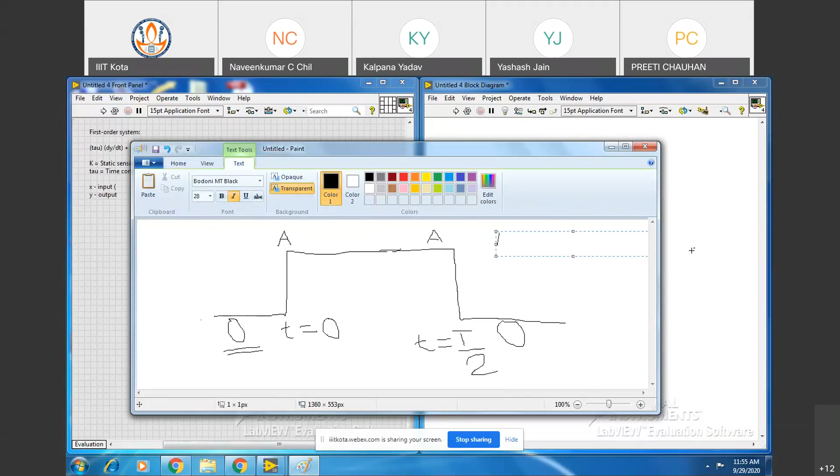Now if you see this total, is it resembling something? This total input is called a pulse input. You got it or not? This is your pulse input. Now, can you see, the pulse input has two components. This one is your positive step, and this is a negative step.

So in order to know the system dynamics, we always calculate how fast the system rises from one level to another level. Suppose you apply a step input. How will a fast system respond, and how will a slow system respond? What do you mean by a slow system? Suppose you have applied one input like this. Just see how I am drawing. This is the behavior of a slow system. Ultimately, it has to catch the final value.

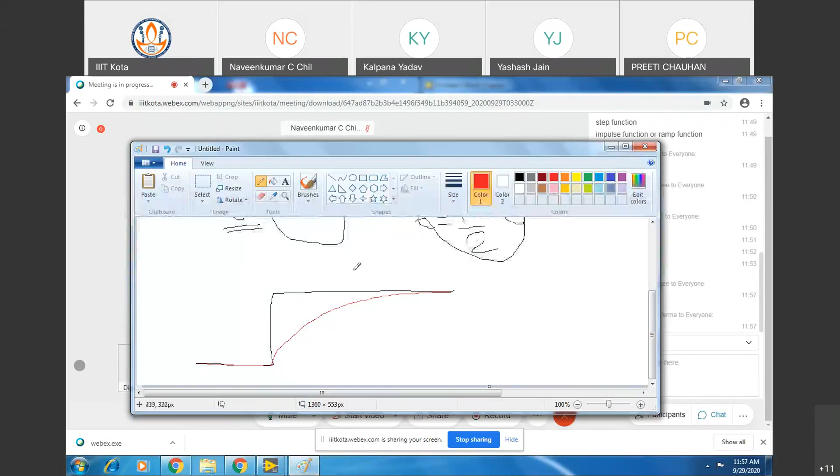Is everyone with me, following? Not getting voices. Yes, sir, you are saying that yes, you are following. Okay. So I'll move ahead.

So this is your slow system. Now, if another system is there, and suppose that has a response something like this, then which system is faster? Can you tell me? The one which reaches the steady state earlier, that system is considered to be faster, right?

Now there is one particular quantity that determines the speed of response for any first order system, and that is called rise time. Rise time is the time taken by the system to rise from 0% to 90% of the maximum steady state value. So the system which takes less time to go to the 90% and above range will be considered faster, and the system which takes a longer time to move from 0% to 90% will be called slower.

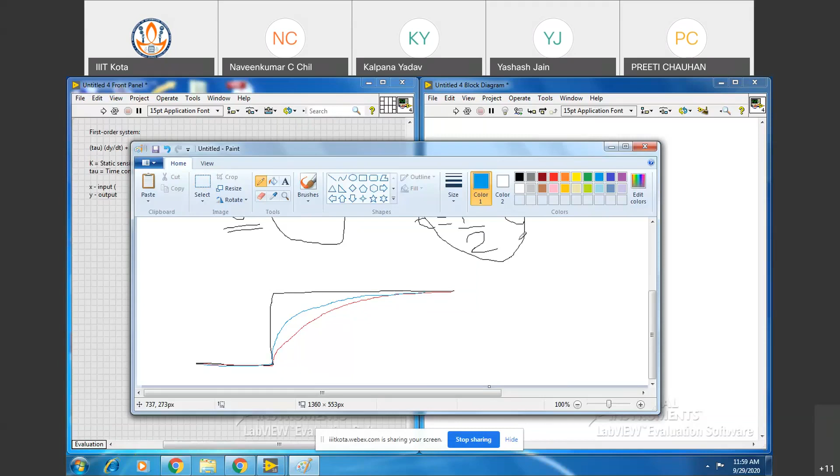So this is one input that is called a step input. Now there are other inputs also. We will see the step input in the form of a square waveform. Okay, input is a square. Then what else can there be? Have you heard of the sinusoidal waveform? Why do you go for a sinusoidal analysis?

Sir, because any signal can be represented in terms of sinusoids because of the Fourier series. Yes, any periodic signal can be represented as a sum of sinusoids of different frequencies, that we know. Okay. So that is one very important concept.

Raghav, I think he is Raghav.

So that sinusoidal response is one of the important ones. Then one more thing: if you want to know the frequency domain characteristic, whatever signal I have drawn earlier was in the time domain, right? This was the time domain behavior. Now if you want to know the frequency domain behavior, why you go for it, you see which frequency components are the strongest.

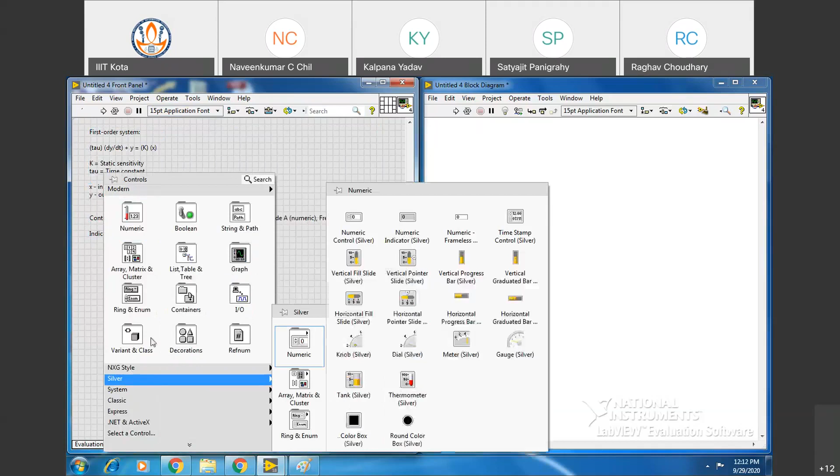Now let us make something. Let us go to silver, numeric. Okay, let us say this is one, what you want to call it, static sensitivity.

Let us make a copy of this. We'll call it time constant. Let us name it as K, and the time constant, let us name it as tau.

Sir, we should do it along with you, right sir? Now, yes, that's what I was feeling, that no one was responding. Can you start along with me? Yes sir, we will. Both are two numeric controls, right sir? Yes.

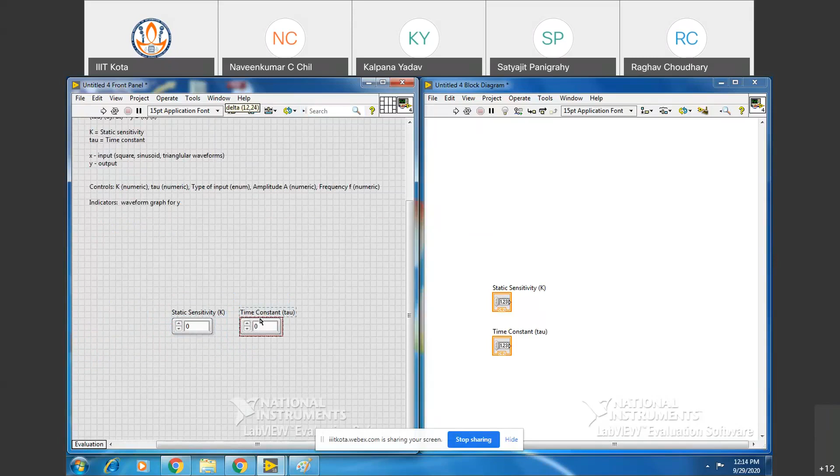So these are the system description. Now we have put the system description. Let me put this nearby. Now it is fine.

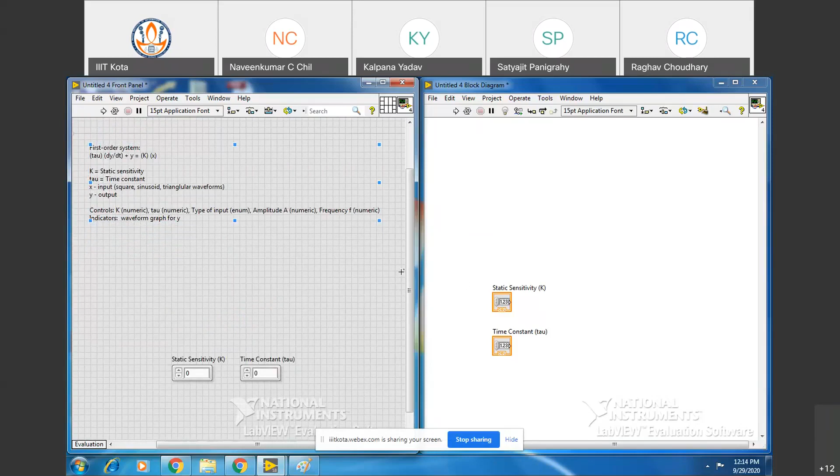Is everyone done till here? Now tell me, I have put two controls right now, and what are the other controls?

Other control will be one type of input. So I'll go to silver, ring and enum, I'll go to enum, and I'll put type of input here.

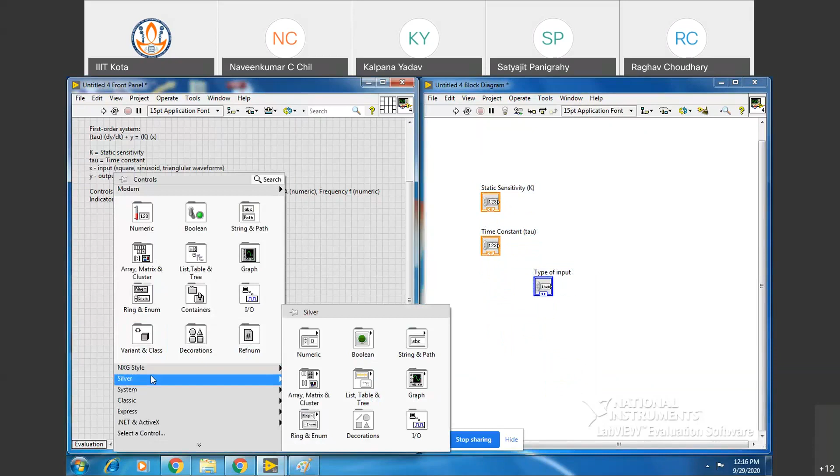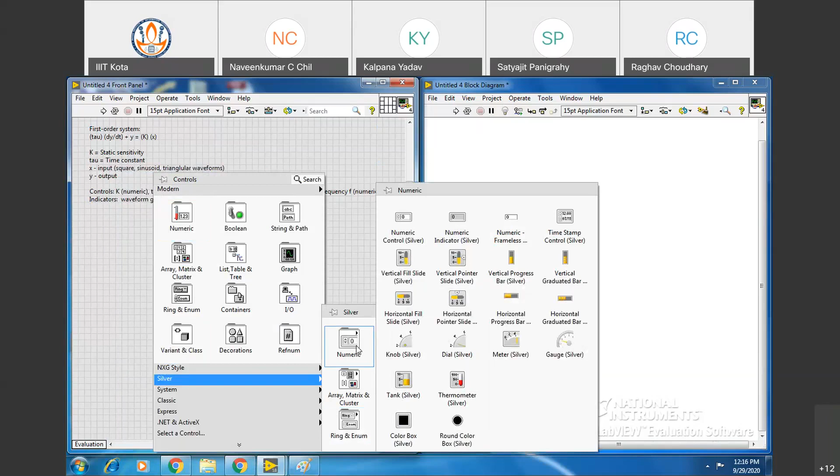Everyone has done up till this? Should I repeat how to do it? Go to front panel, right click, go to silver. I can pin it also, that Vineet told to pin that. So then go to silver, go to numeric, and go to control, numeric control.

Again, for a time constant, you highlight that, you select that particular control, then with your left hand press the control button and drag it like that.

Could you see, sir? I have placed both of them from this control palette. Any problem, sir? No problem, no problem. Only that it will look a little fancy, but there's no issue. Actually some problem will come in the actual deployment where you want to keep the size of the other things very minimal, so there it can become a problem.

You'll select and give that as a minimum space. Anyway, that you have done, Naveen, till here.

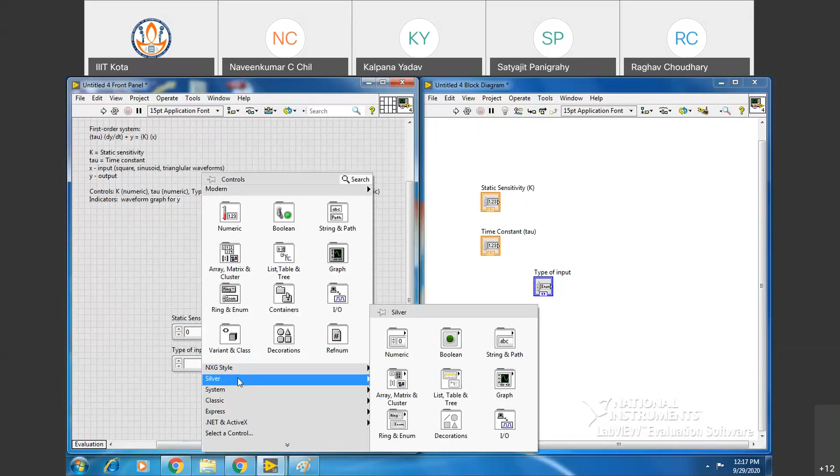Static, sensitivity, actually that enum placing, I need to repeat the steps, sir. Yes, please. Right click there, go to silver, then on the row number 3, ring and enum, and then go to enum.

Yes sir, for this also I was just directly going to this. Yeah, no problem, this also enum. Okay, that you can do. So yes sir, that we have put. Now the type of input we have determined.

Let us go to its properties, then go to edit items. So what are the inputs we want?

Sine, should I put it sinusoid? Sinusoid. Okay, that is one, then insert. The second one is your square. Insert, and the third one is your triangular.

Let us make sinusoid as number 1, move up. Let us make square as number 2, move up. Okay, so this is the order you have done.

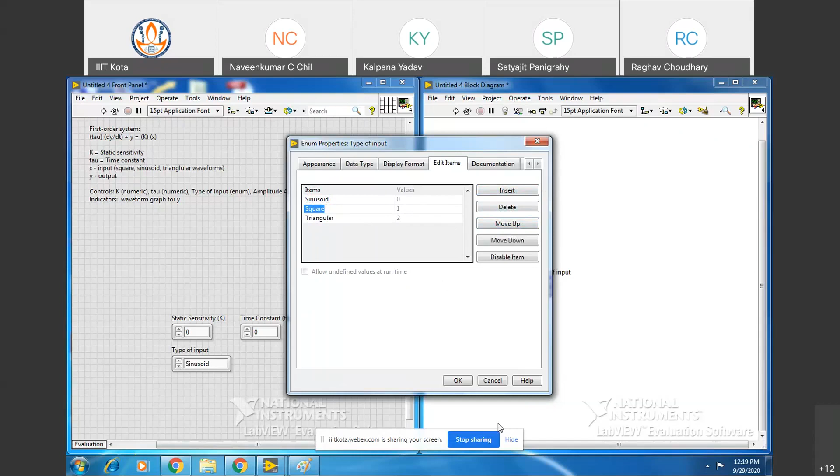Everyone has done this? No sir, just give me a minute, I'll repeat. You can go to properties on either side, either on the block diagram or on the front panel.

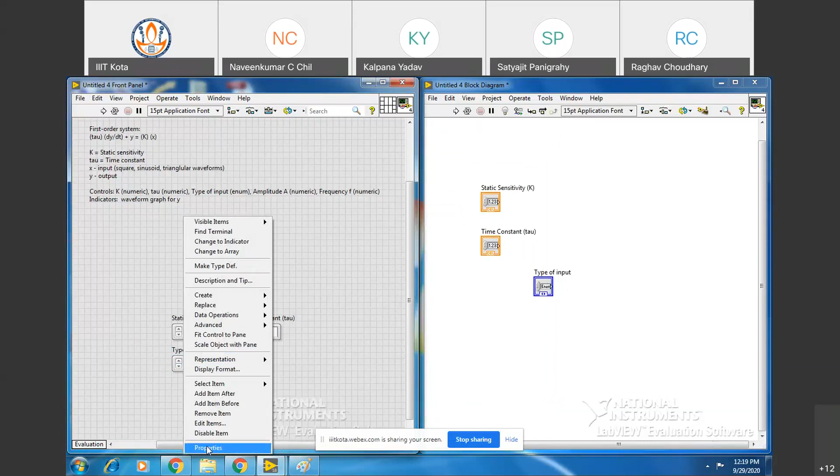Suppose on the front panel I'm hovering my mouse. You just see, I have hovered my mouse, so now it is highlighted. There I have clicked the properties. It may come to appearance or data type by default, then go to the edit items.

Can I get a quick review, a confirmation from everyone that they are with me? Raghav, if you can. Yes sir, done. Yes, done. Because I'm not seeing the chat, since I'm sharing my screen on the other window, so okay, done.

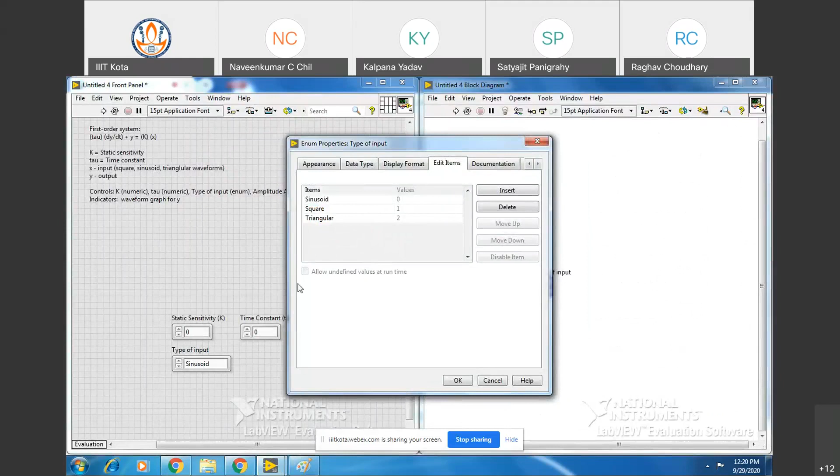So now what we'll do, we'll create the amplitude and frequency. Go to silver, numeric control, silver, and then we'll select the amplitude. So here we'll select the amplitude.

And finally we'll select its frequency. F, amplitude.

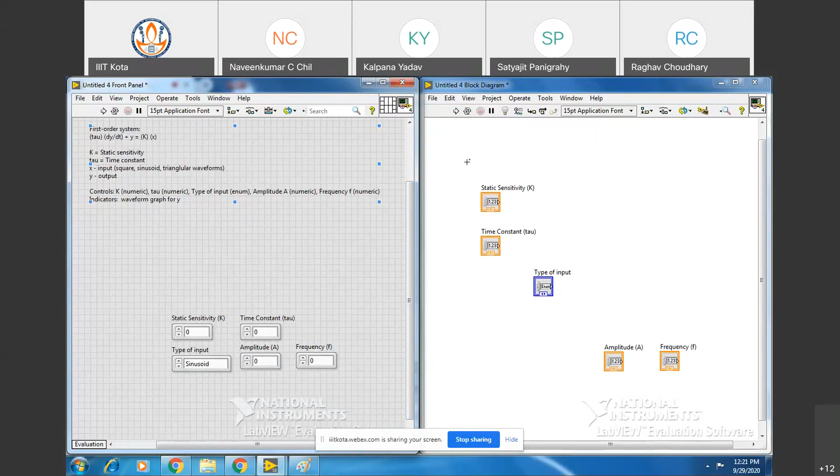Now I'll put all these things within a while loop. So we are done with the front panel basically, now go to the block diagram, right click there.

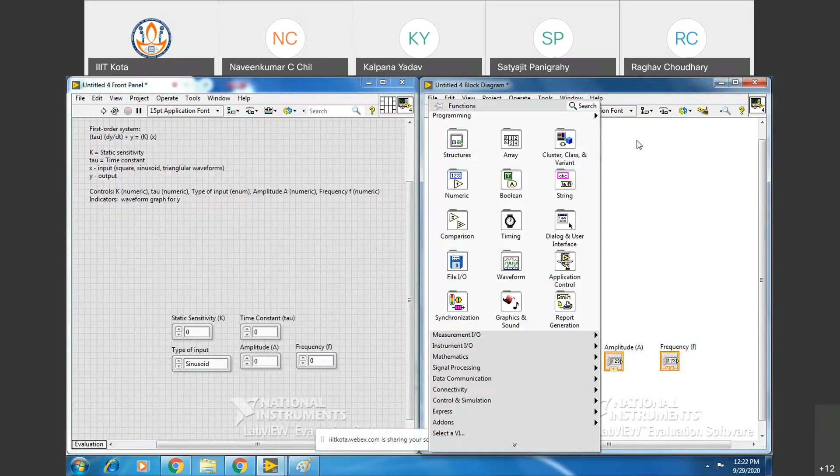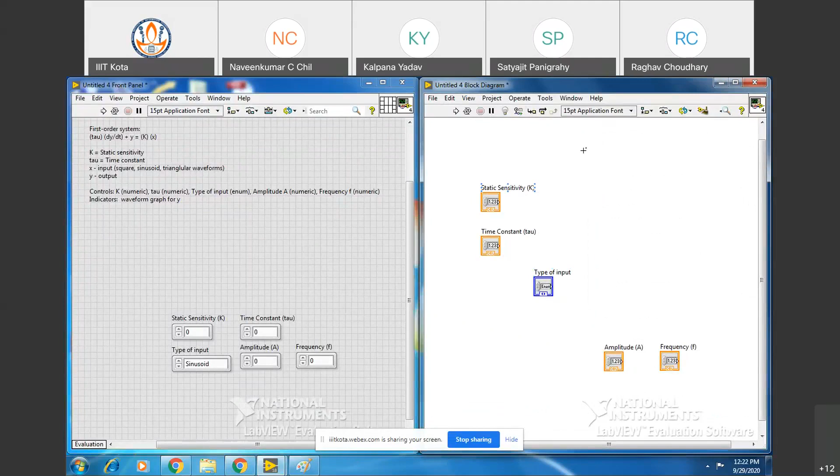Go to the block diagram, right click, and go to structures, go to while loop, and place your while loop such that it takes all these values in it.

Can we use that Control U? No need to use Control U right now, because Control U should be used at the end only, otherwise sometimes you would like to place the things as per your need also, no? Yes sir, okay.

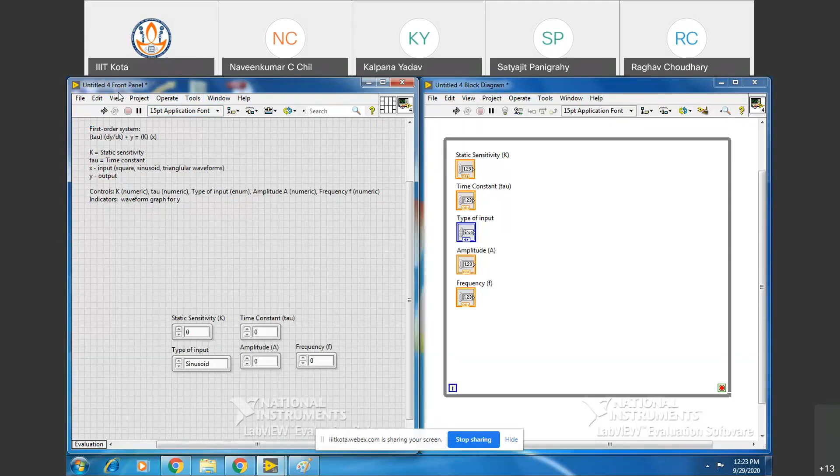Now here I would like to tell there are some tools, view, then there is something edit.

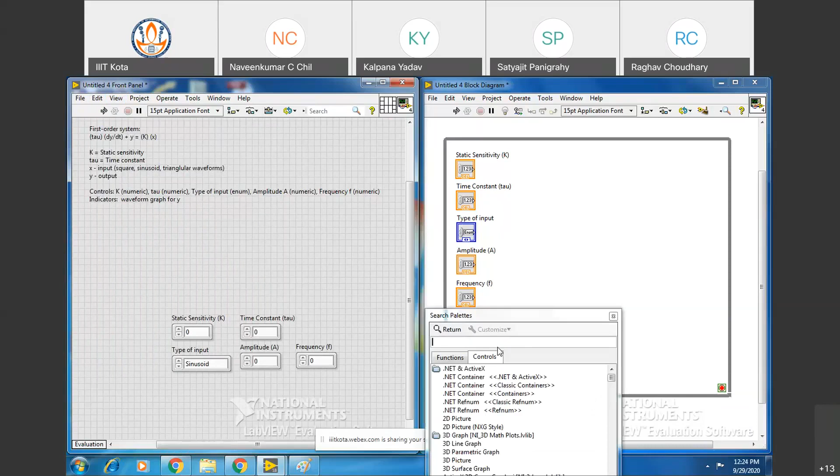There is a right click here, can you see one decorations? Yes sir, decorations, can you see all of you? Right click on the front panel, go to decorations. Can you see all of you? You can also go to, yes sir, here silver, and then you can select one of the decorations. Suppose this is the decoration I am selecting.

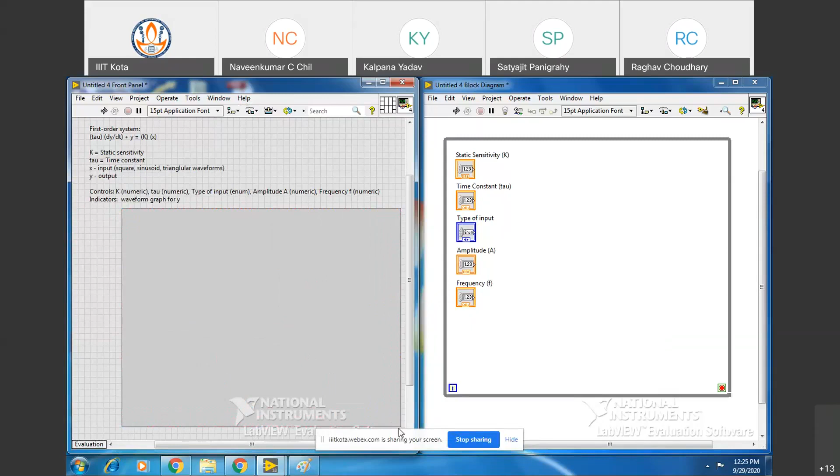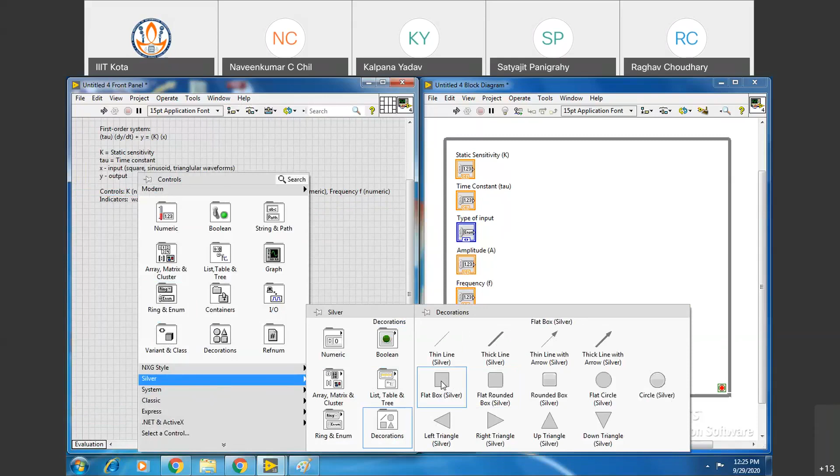So I can actually put everything. What I'll do, remove this for time being. What I'll do, I'll put the decorations, and then I'll put all these elements on it.

Properties. To make it visible, but decorations, that is not color, control background. Actually here we can select the particular color for this. We can, unable to do that, one second.

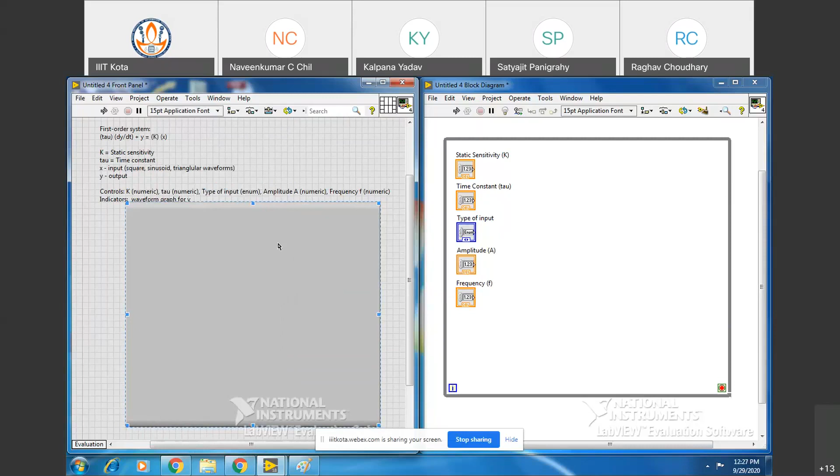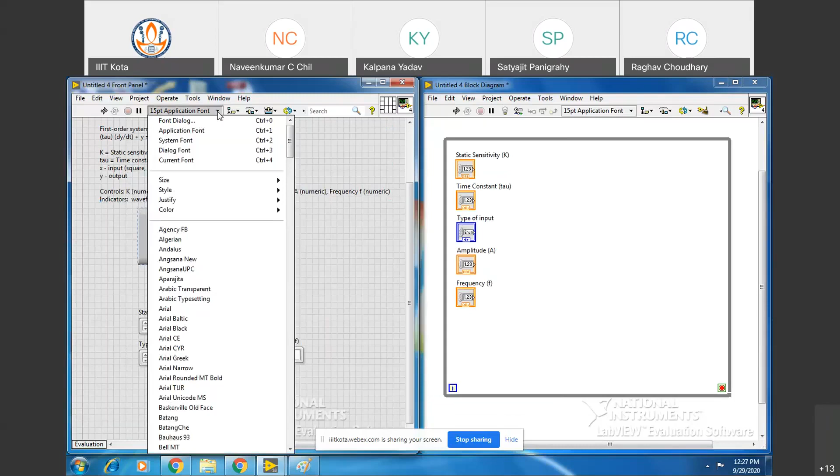Anyway, this decorations we can use. I think I should be able to put that decorations, properties, color.

Okay, anyway, I am unable to do that, but you can use that decoration. Actually, all these will come into that. Anyway, for time being, we will not concentrate there.

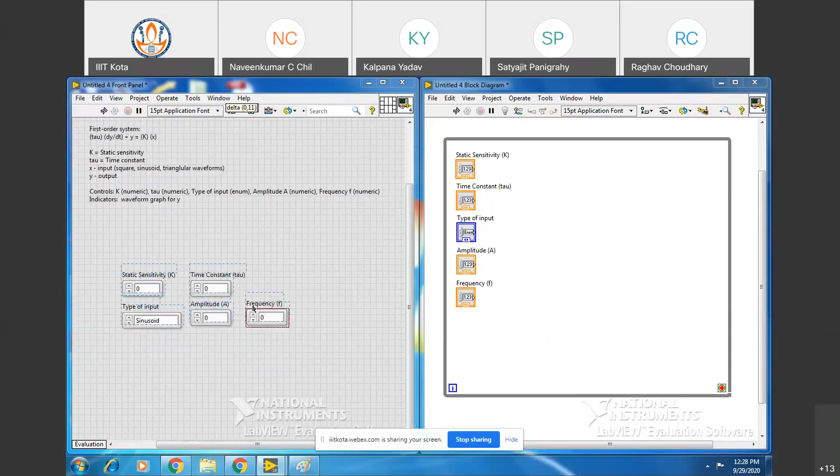Now, our main part is to generate one simulate signal. So how do we do that? Go to the block diagram, then control space bar. Then what is that? Simulate signal.

Everyone has done this. Yes, sir. Okay, everyone has done this. So simulate signal is this.

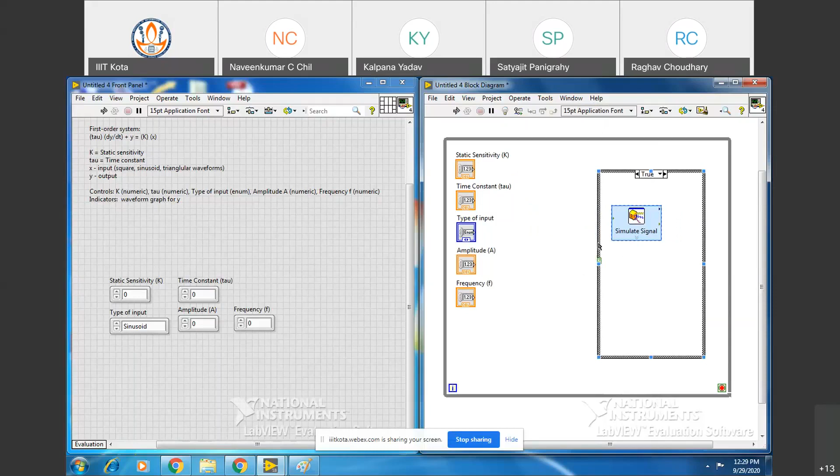So we'll put the number of... we can make one case structure here. Suppose I have made one case structure, I'll put this inside. I'll make one case structure, and the type of input I can connect to this case structure.

Is it fine with everyone? How many cases are showing up? Two, right? So one add case after, add case after is the triangular one. Okay, so let us do further.

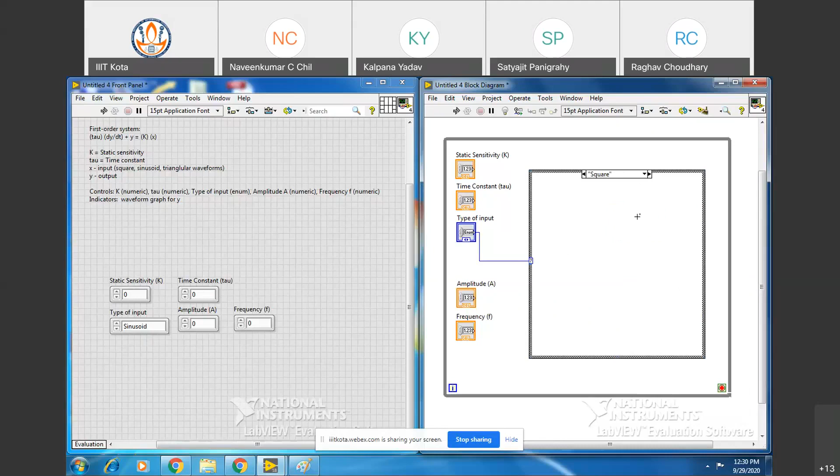First the sinusoid one, and then we'll replicate the same thing elsewhere also. So frequency and amplitude we'll have to select here.

Actually, we are not changing anything in that. What is this, simulate signal, right sir? Configure simulate signal, we'll give this to that amplitude. We'll give the amplitude, and we'll give the frequency also. Okay sir, these two inputs we'll give.

So suppose it is 1, it is the number of samples. Suppose I'll take 500 samples per second, and the total number of samples will be 5000. Okay, integer number of cycles, you take the integer number of cycles, right? Just see, everyone has done this part.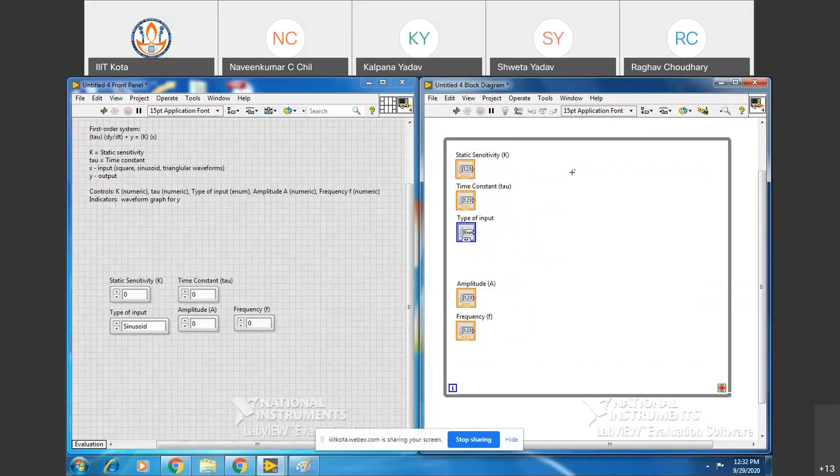One had that controls, that is sensitivity, time constant, time, or type of input. I'll remove this, remove this also. Everyone is still here, so everyone is having till here.

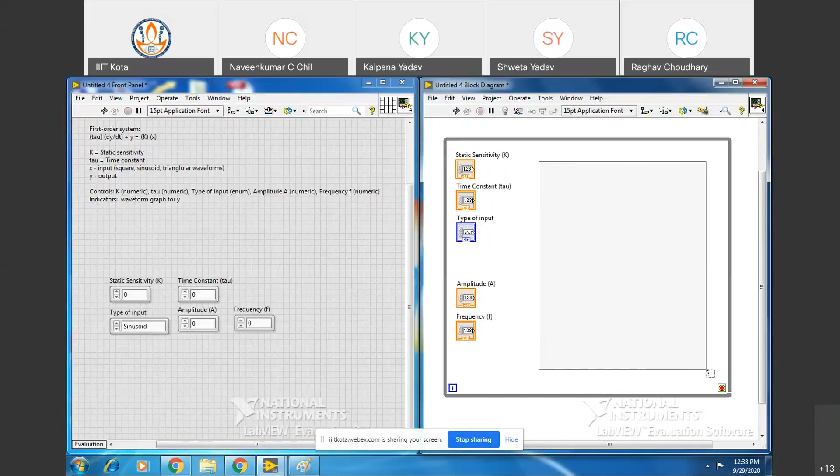Yes sir, yes. Now make one case structure. So go click somewhere, anywhere, then right click there on the block diagram, go to case structures, and then you put it inside the while loop. You connect the type of input to the case selector level.

How many cases, can you see this case selector? Now can you see this selector label on the top? How many are showing up? It is showing only by default 2.

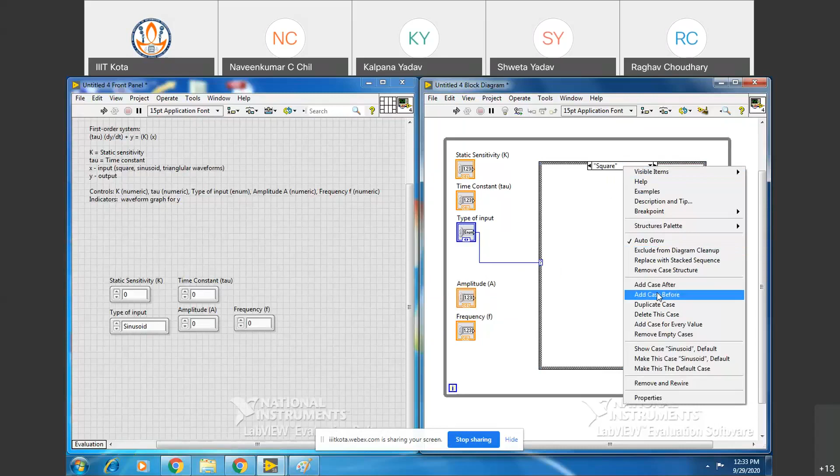So when you have more than 2 cases, you'll have to add it manually. So I will put add case after. So it has come, now you just see it has come all the 3. Is it everyone is still here?

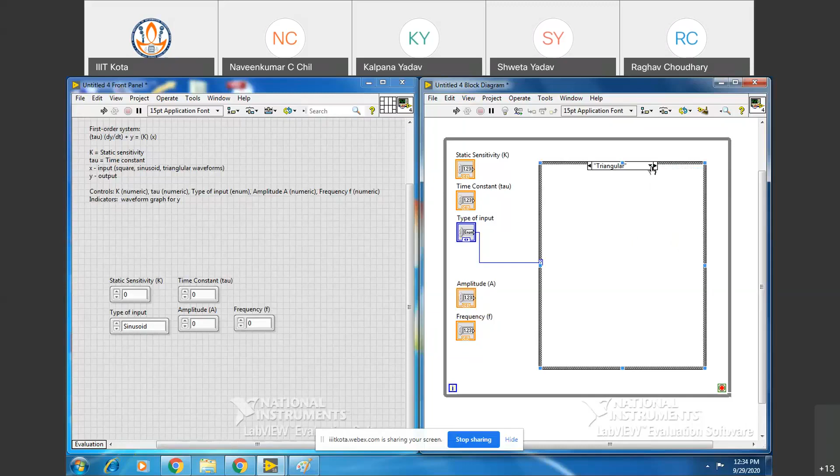Sinusoid, square and triangular. So let me begin for sinusoid, let me begin for sinusoid.

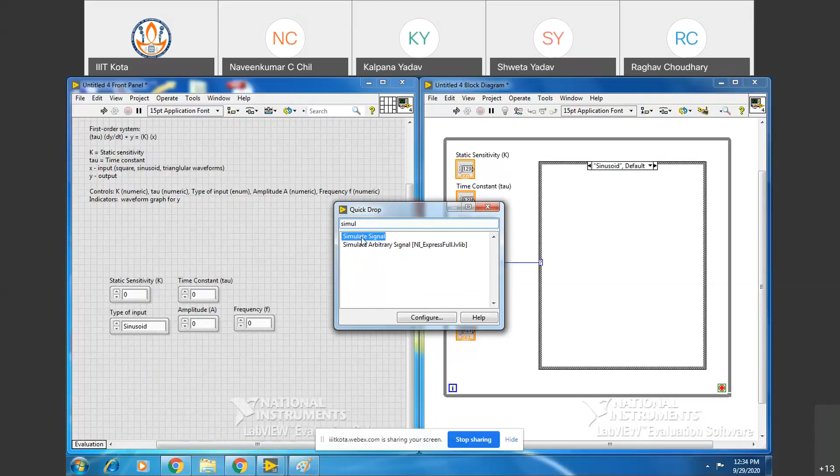Within the case structure, right click, otherwise control spacebar, quick drop. So then you type simulate signal, that will put one express VI that will behave like a function generator giving us the sine wave, because we want that sine wave somehow.

So double click that and put it inside the sinusoid case. So now could you see this is moving? You make this as the integer number of cycles. Could you see this has stopped, integer number of cycles? It has stopped, right?

So the 10 hertz is big, so I'll put 1 hertz, and then I'll put 500 samples per second. And then the total number of samples will be 5000, I'll put it as 5000.

So actually, I'll take the total number of cycles to be 5000, okay, total number of samples. So I have configured my signal.

Now what I'll do, I'll drag it down. Can you see that so many options are there? That type, I have chosen sine, same as sinusoid. The amplitude I'll just connect to the tunnel, to this amplitude, and the frequency I will just connect to this, to the frequency.

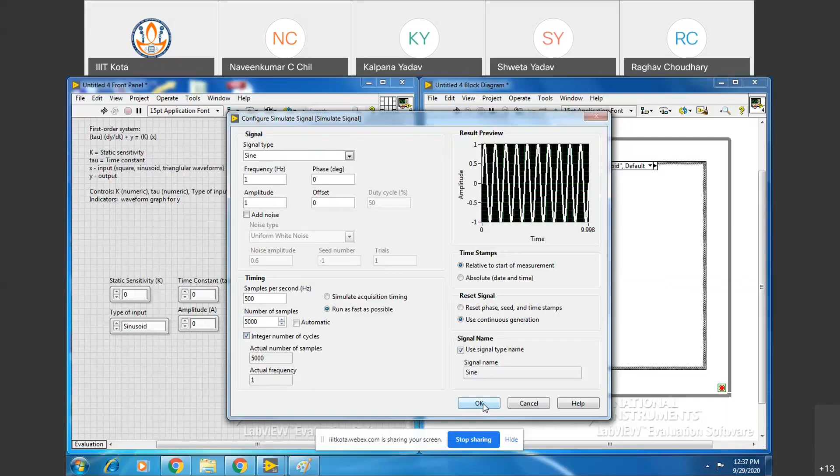Anyway, we'll go further. Now the next thing is, first thing here, you come here, this system. Now I am at front panel. You just see this system, I have the differential equation. Yesterday or day before yesterday, I told you what was the definition of the derivative. This I can write.

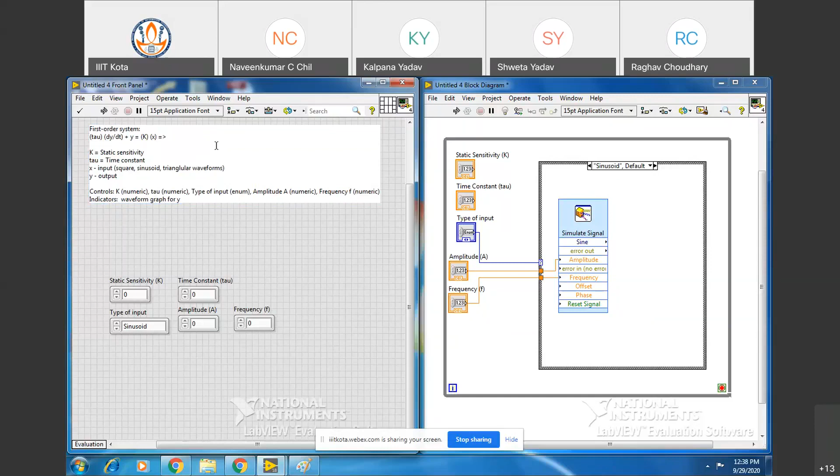So just see, tau into dy by dt. What I can write? I can write dy by dt as y. Suppose the present value is yk minus the previous value yk minus 1, I can say y1, and this divided by the term delta t, dt. This definition of derivative is fine if delta t is very small, dt is very small.

So this will resemble plus y is equal to capital K into x, right? Where these are the sampled values, each sample value for each sample. You know now the difference equation form from numerical analysis. So what I am doing, I am discretizing it. Okay, so this is that thing I have done.

Then if I solve this, what will be the value of y coming to me? Can you tell me the value of y that we need to have? That will be

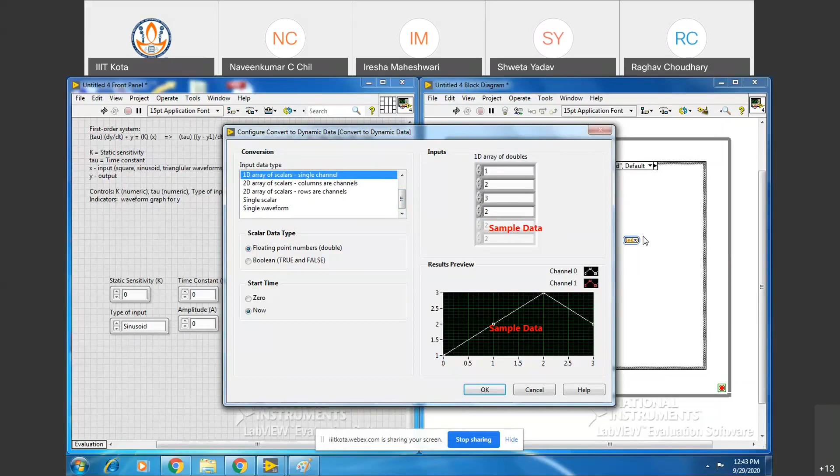Okay? You have taken convert from or convert to? Sir, you have taken convert to dynamic data type. Convert from I have to take, no? Yes. That's all. Convert to. Sir, press F, sir, means by deleting T. Convert from dynamic data type.

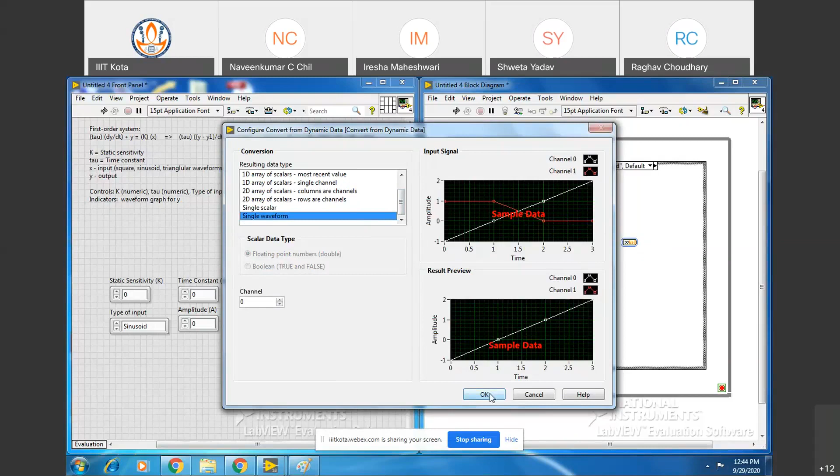Okay? Yes, sir. Now here you will be selecting the single waveform, since we are dealing with the single waveform. Okay? Now you connect that. Got it? Everyone has done that? Yes, sir.

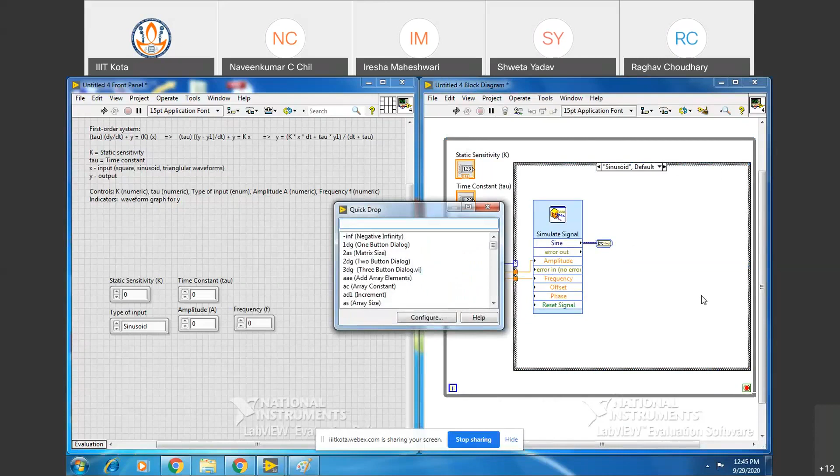Now put one more component, get waveform components. Control space bar and then put get waveform components. Could you see this? Okay. Now you drag it like this.

So what is Y here? Can you tell me what is Y? What is dt and what is t naught? T naught is your timing information that will be used to synchronize two signals, right? And what is dt? dt is your sampling interval.

And what is Y? Y is nothing but your amplitude of the sample. Now can you tell me, this simulate signal sine wave is a source, right? So what will this Y give you here? That will be nothing but xk, right? The kth input sample it will give. Okay?

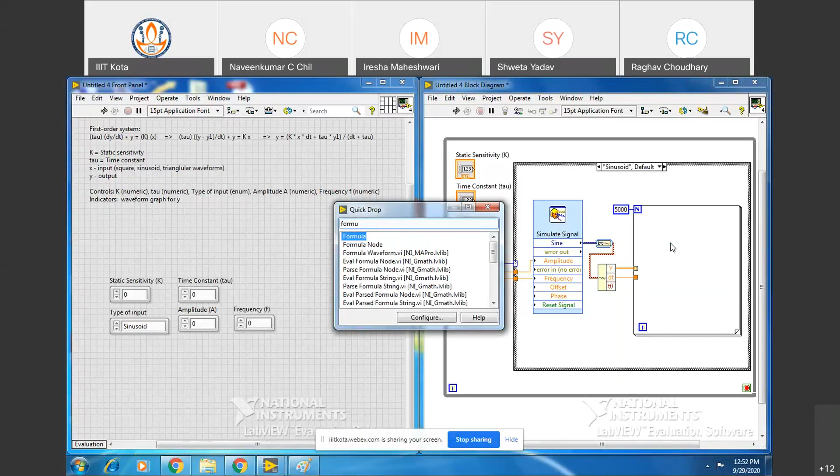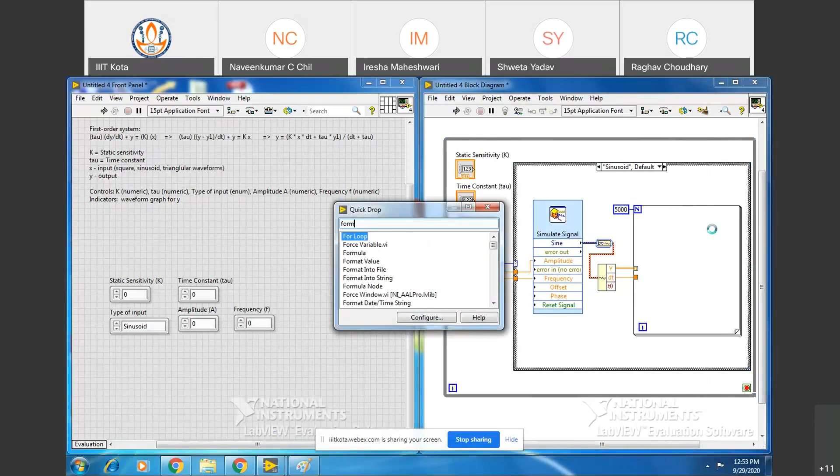Can you see? This is one new thing. I think this you should see once. Right click on the block diagram, some empty space anywhere, not on the boundary of any terminal or function node. On any blank space, put control plus space bar, then put formula, then this formula node will come, and you put this formula node within this. Done? Everyone has done.

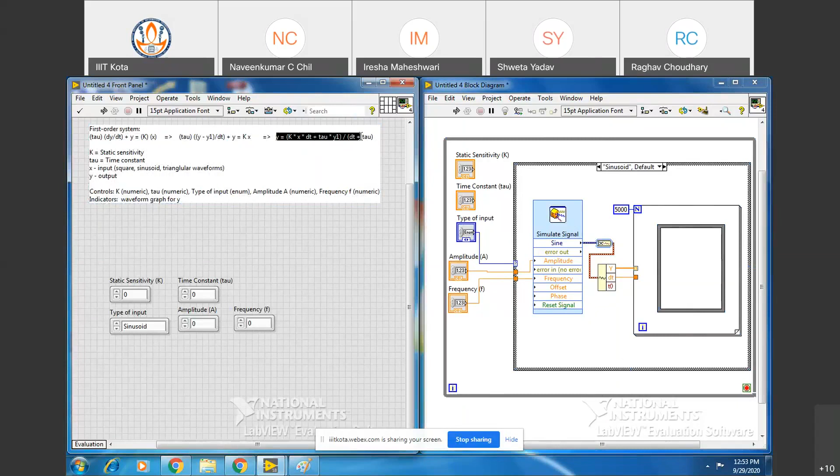Then within this node, I will write the same formula which I had written here. What is that formula? Y is equal to K, no, there should not be any space, K into X into dt, plus tau into y1. y1 is another variable, so this is the numerator part. I'm putting this inside the bracket.

Now let me make it full screen so that you can see better. Then divided by how much was there? Tau plus dt, and then put one semicolon. Right. Now, have you done this till here? No, sir. We are typing the formula. Just a minute. Yes, I'll wait.

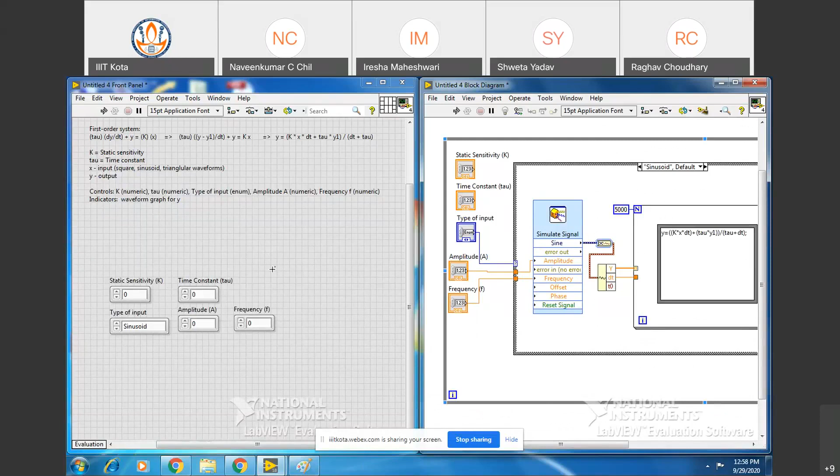Raghav, does your front panel have this static? Sir, I am at the formula node stage. So I'll just explain this. The terminals you have, all the controls, and then you have made the case structure, right? Then simulate signal, convert from dynamic data, and get waveform components you have made, right? And then you have made the for loop, and now you are writing the formula, right?

Formula node have you created? Raghav, have you created formula node? I think there is a network issue on their side, sir. I don't know. Okay, so let him join again. I'll explain to him. There is no issue. I can again explain to him. Yes, sir.

Have you done till here? Now just see, in the formula node this y is your return value, right? And what are k, x, dt, tau, y1? They are nothing but your input values. Okay. So now right click on the formula node periphery. Can you see there is one add input here? So click on add input. I will take one input as K, capital K.

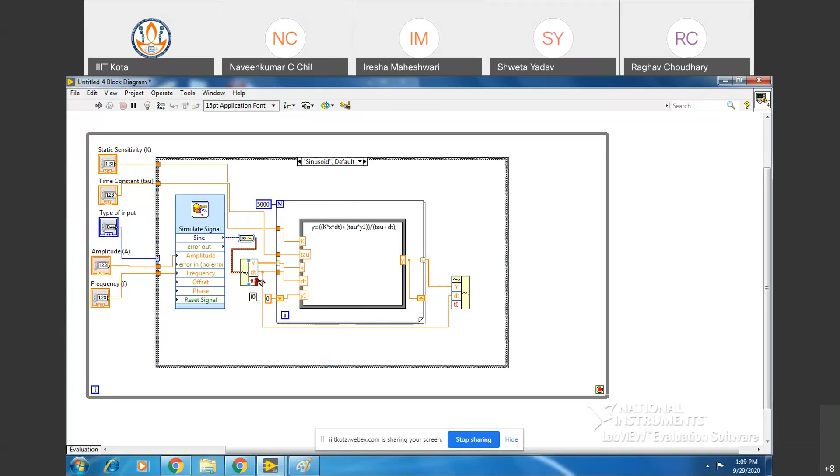So this will be build waveform. This attribute is your dt and this is your t naught, right? And this is your y. This dt is the same, the sampling interval, and this t naught should be connected here also. Everyone is here? Done till here.

Sir, what is this Build waveform? Now with each sample, you would like to place those output samples one after another. Earlier we used get waveform components, so we have discretized it. Each sample we are taking as input. For each input sample we are calculating the output, and then we are building this waveform.

What's the name of that, sir? I missed it. Control space bar, then you put build waveform. Okay, sir. Just a minute. Remove that quick drop window. Done. Now you connect the output of y here to here.

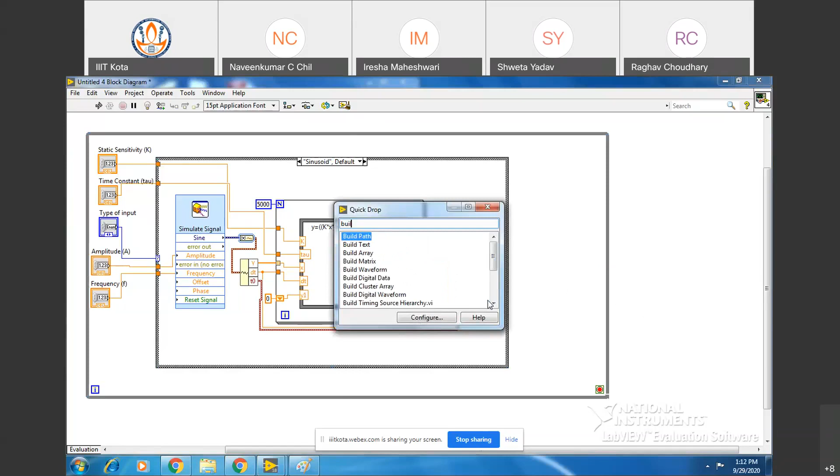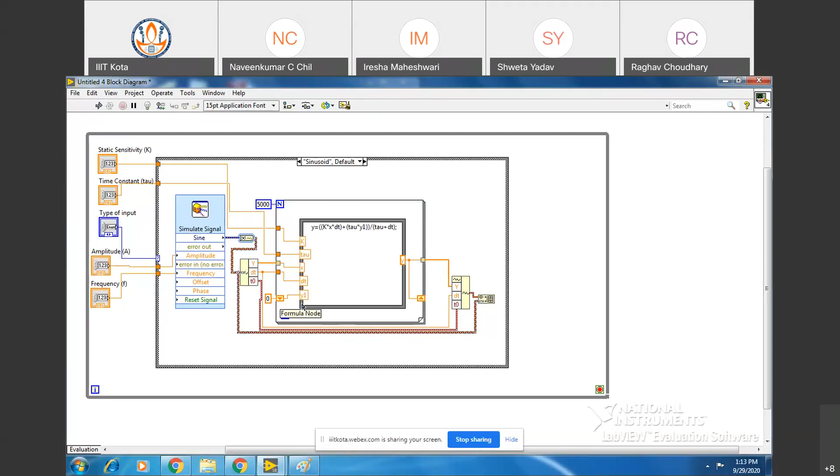Now since we'll be displaying both, we'll build one array. So control space bar, then build array. Since you would like to display the input and output both, in the array one will be for the output and the other one for the input. Can you see how I am connecting? Yes, sir. Okay.

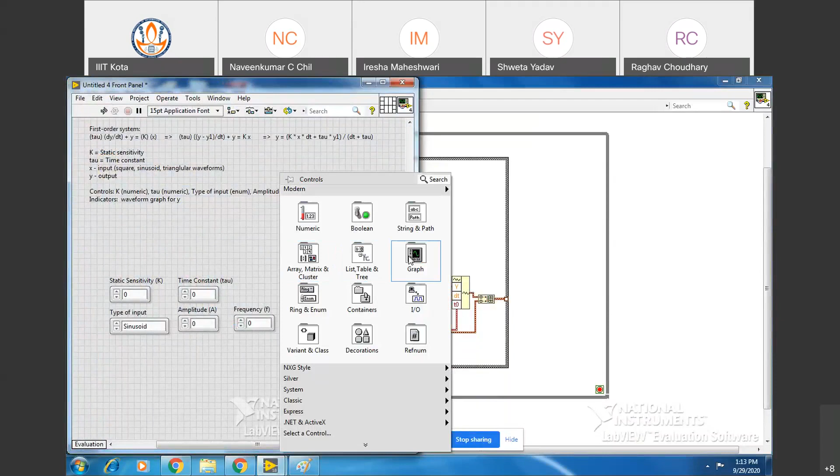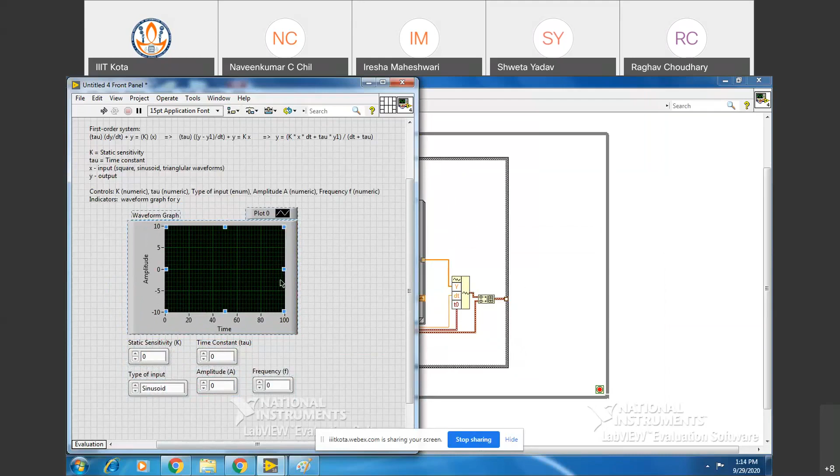Then you take this out of the case structure. Then here you can create not an indicator, but one waveform graph. Control, graph, waveform graph. I'll put it here for the time being, make some space, and put them here. Now this I'll put here and then I'll connect.

Done. Wait there. 10 more minutes. All of you kindly be with me so that we can complete this. Yes, sir. Done.

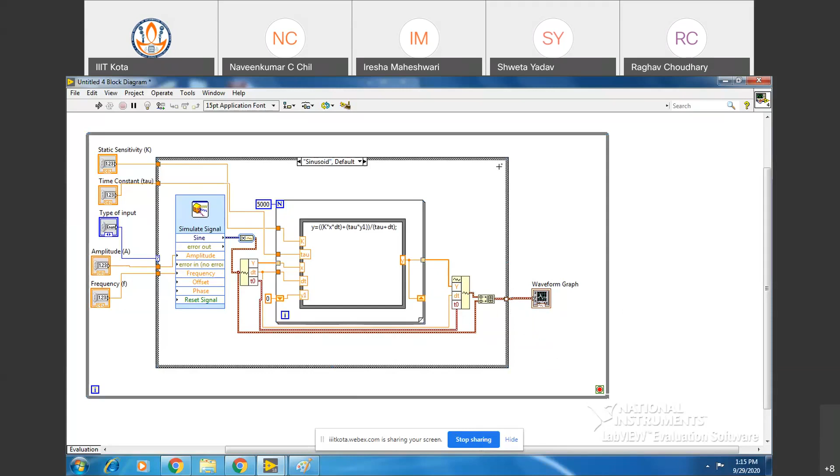Now can you see there is a small white groove coming on the case structure, on the right side? Why is that so? Because all the cases have not been connected. All the cases have not been connected, right? This we have done only for sinusoid. So what we'll do, this we'll take as it is.

Can you see that I'm selecting the total? Can you see how I'm selecting? Yes, sir. It is the entire case structure, right, sir? Means I'm selecting all the components inside that. Could you see that now everything is getting highlighted within the case structure? I'll press Control C. Control C is for copy.

Then I'll go to the next, square, and I'll put my cursor, I'll click in the middle. Then I'll press Control V. Now don't click anywhere. You have to be a little careful. Everything is highlighted. So just carefully drag it so that you place it accordingly, so that it will be easy for you to connect everything.

Now just see, this has to be K. This I have connected. This has to be tau. This I have connected. This has to be amplitude. This I have connected, and this has to be frequency. This I have connected. And this has to be output. Done for the square wave also.

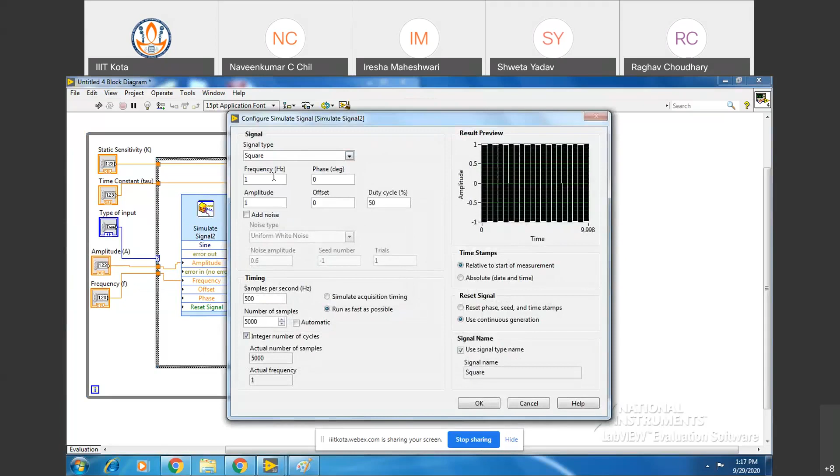Now what we'll do, here in the simulate signal, I'll go and change the sine to square. Everyone has done this? Just change sine to square and nothing else. Other things we let remain as they are.

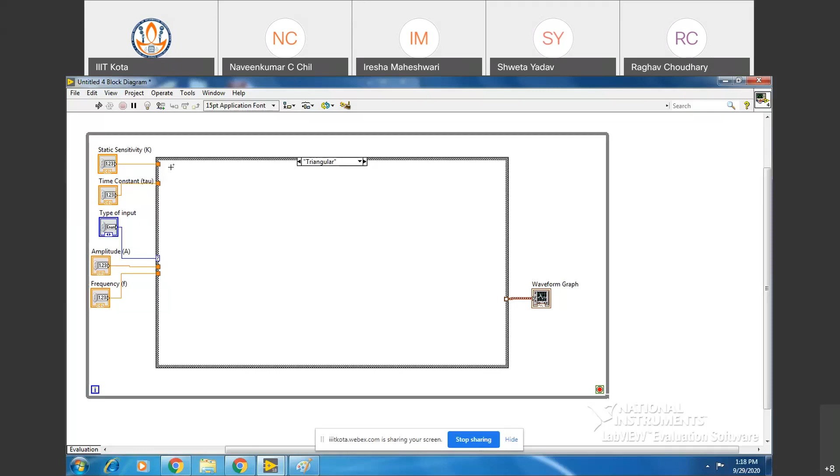Now go to the next, triangular. Again put the cursor in the middle. Actually, if you put the cursor in the corner, it takes that as the pasting location. So put your cursor in the middle, click and then press Control V. Then you'll see that your copy paste is almost aligned, and then you align your pasted result a little.

So everything is getting highlighted, could you see? And then you connect all these things carefully. Can you see how it is easy? If you take a little care, then it will be very easy to connect. Yes, sir. All three are ready, I think.

Sir, actually, we can't zoom in and zoom out in the block diagram. Now you just see, it will be completed now. Now it is completed. This is done. This is done. Still some error is showing. I think we have to stop this while loop also.

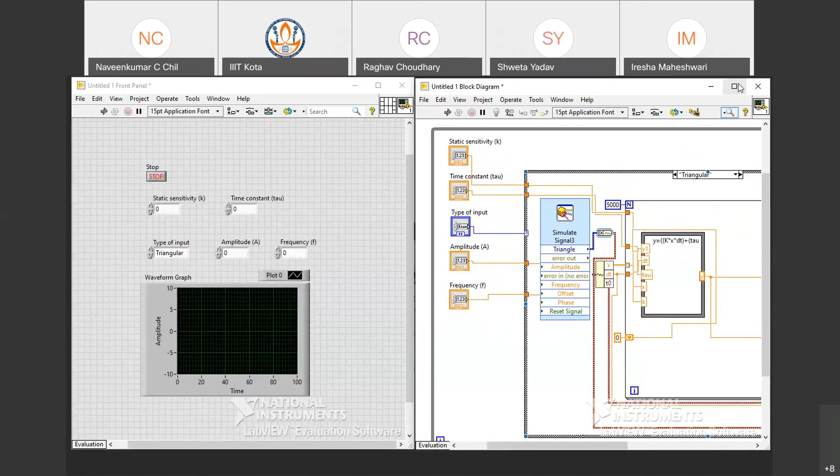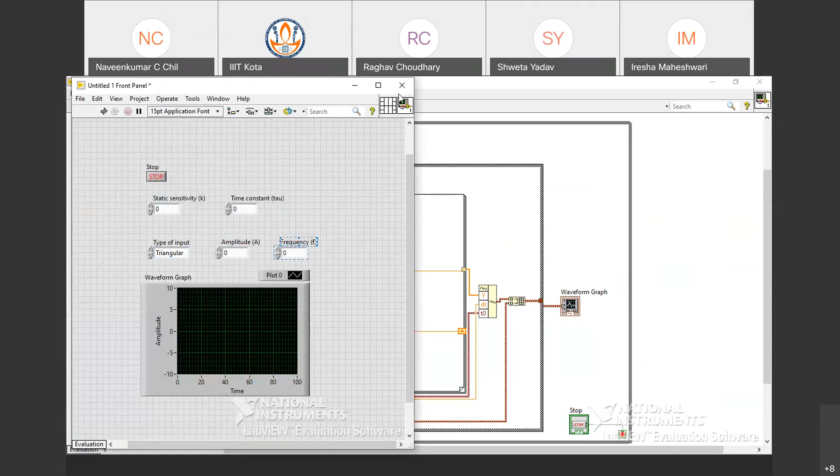Triangular. Can you double click this frequency, this one sir? Click on that broken arrow on the wire. You will see what errors are there. Click on that broken arrow, see where it is. Double click on the formula node and everything, and you'll get to see what is the error.

Oh, the formula is incomplete. Actually, that's the error. Expand the formula node window, expand it. No, it doesn't seem incomplete. Then what is the error?

Sir, actually it was in a sine mode. I changed it to triangular, but even after changing that, it's not the actual error. The issue is in the formula. Because you have written semicolon. So do we have to write it? Semicolon is there, semicolon is there. Okay, I can see the semicolon.

Tau plus dt is there, block diagram error on... I think you have written that first bracket you have given in this, that parenthesis or what? First bracket. Yes sir, it is a parenthesis.

Make it full, that y1 x k, your k is small. Just see, k is small, it should be capital. Oh, in the input side? Yes sir, in the input side, you have written small k instead of capital K. Your formula requires capital K.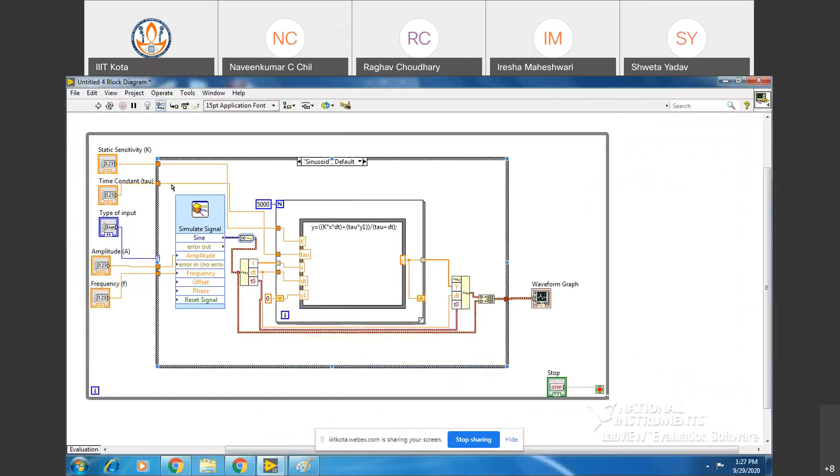Now just something I wanted to say, now everything is fine, right? Now just see here, this is static sensitivity. Suppose I want to make this - by default it takes 0, right? Suppose I make it 1. And suppose I want, static sensitivity is 1 for most of the system. So what is 1 actually?

If you, what is 1? Suppose if you give x as input, and if you get y equal to x, the same output, then you call that system to be perfectly fine. It is taking the same input, giving you the same output, right? And if you get 2x as output, then what you call? You call it amplified by a factor of 2. Yes or no? And if you get 0.5x as output, then what do you call it? Attenuated.

So if you see one resistive network, then the output is always attenuated. What will it do? It will attenuate the input. Okay, the output is attenuated input. And what does an amplifier do? They amplify the input.

So this is, for the best of the system, static sensitivity is taken as 1. Now if you run your present program, na, it takes 0 as the default value. Can you right click on this?

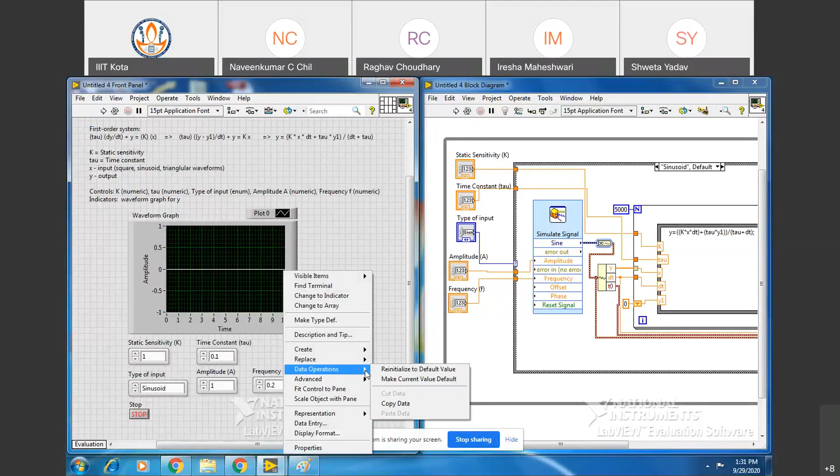Actually, what happens is, suppose you run the whole program, then close LabVIEW, and when you restart and reload your program, it has to initialize these controls. So what values will the controls be initialized to by default? The program has to load some default value before you pass any value. That default value, for a numeric, is usually 0, because it's very easy for the software to initialize everything to 0. That is what we have learned in the literature also.

But if you want some specific value to be there forever, say you want it to start from 1, you keep it as 1, because in a large system with many components, how many times will you go and change the control values each time you reload? It would be annoying, you'd have to keep repeating the same clerical job, and then you cannot work on development. So what we have done is, if you restart this, it will load these values only.

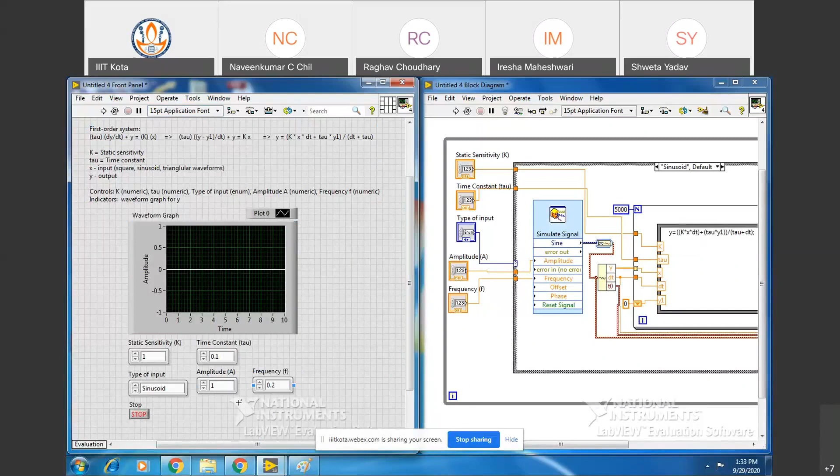Once I have made this the default, let me run this now. Let me make it a little bigger so you can see all of it. Now just see, this is sine, this is triangular, and this is square.

Can you see the square? Is it following the square? The red lines are your input. I hope all of you are getting this on your own screens.

Let me change the value of the time constant. What will happen if I increase the time constant? It has become sluggish now, the system will become slow. Now could you see it's not reaching the final value in that time?

Yes or no? What is the final value? 1. And if I make it very large, if you remember the property of a low pass filter, or a first order circuit, it is a low pass filter. So if you keep the time constant very high, the output will be nothing but the DC value of the input. Now what is the DC value of the input presently? It's 0. So if I make it 100, see, this is almost around 0.

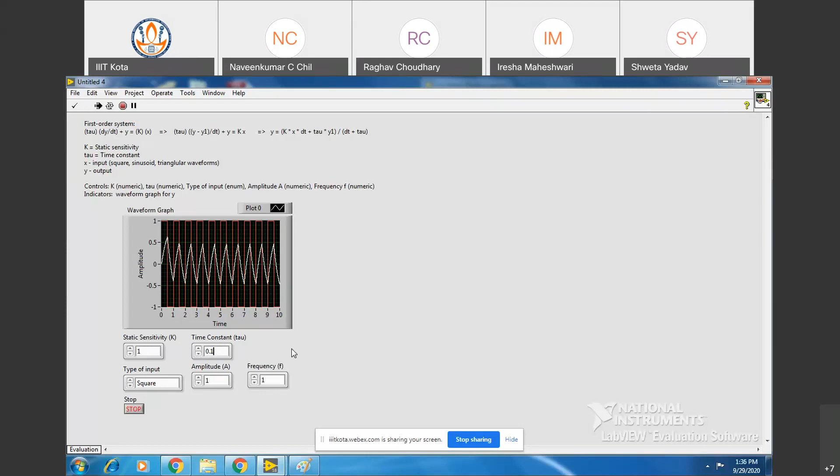If I make it 0.5, then like this, 0.1, it will just follow the input. Can you see it is following the input? If I make it still less, can you see it is following?

So this is how you can learn the behavior of a first order system. Sir, how have you increased the number of cycles shown in the output? The number of cycles comes from the frequency. From that you can increase the number of cycles.

So how is that 10 cycles coming? Because I'm displaying at 500 samples per second, and how many cycles am I displaying? 500, out of 5,000 samples. So it will have that for 10 seconds.

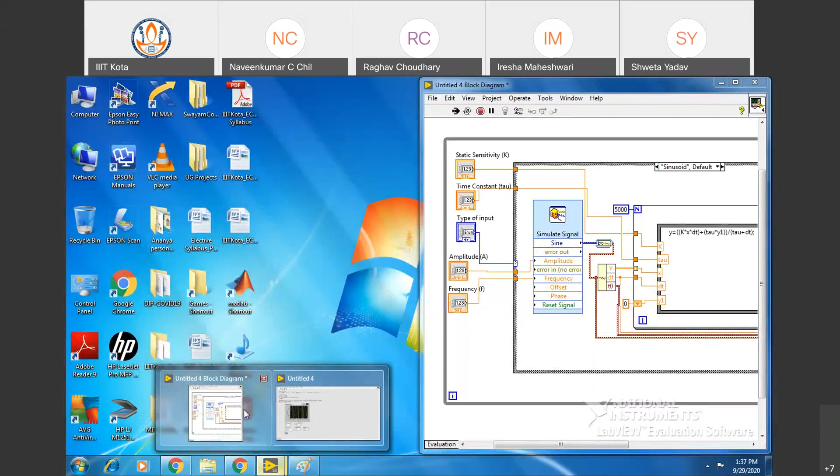Sir, actually I have a problem with the graph. When I change it to square, it is still showing sinusoidal waves. Only the triangular is matching. You have not changed the earlier sinusoid signal simulate signal. Go stop the program and restart it.

Go to the block diagram and maximize it. Let's see the sinusoid case.

Now let's see the simulate signal. What is written? It says sine, but it's actually a triangular waveform. Double click there.

Go to signal type. I selected sine, sir. Select sine and then click OK.

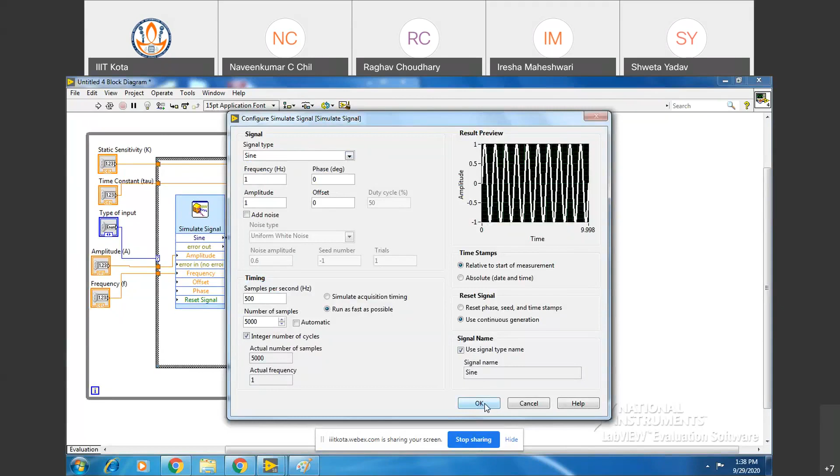Now go to the next one, square. Let's see what is written. Actually it was different, sir, I changed it to square. No problem, I had only changed it for the triangle. The other two were different. I think now it will be fine.

Whatever the case is, that's the selector label you are seeing now. Because the type of input you give, the same thing will be visible in the selector label at the top of the case structure.

Can you see, on the case structure at the top, what is the default value? Just a minute, sir.

Make square your default. Default is sinusoid, sir. No problem, as I said, the default value will be loaded first. You can always change it - right click on the selector label and say make this the default case.

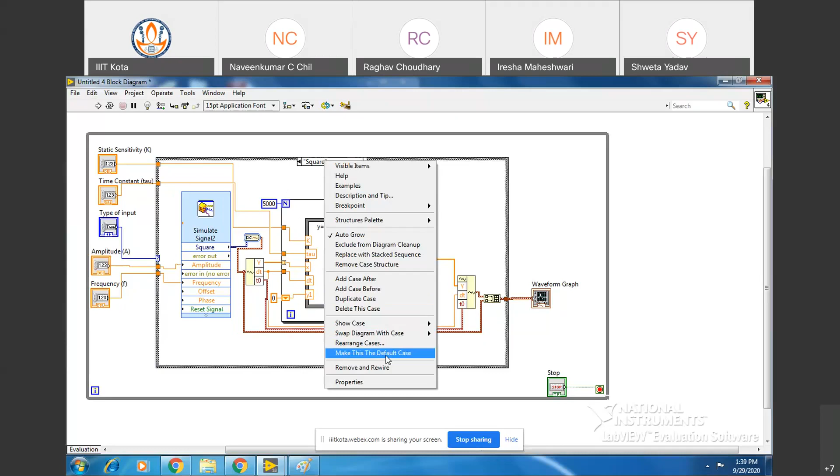Square waveform, right? So now in the square waveform you have simulate signal. Is it showing square? Just a minute. Signal type is square at the top?

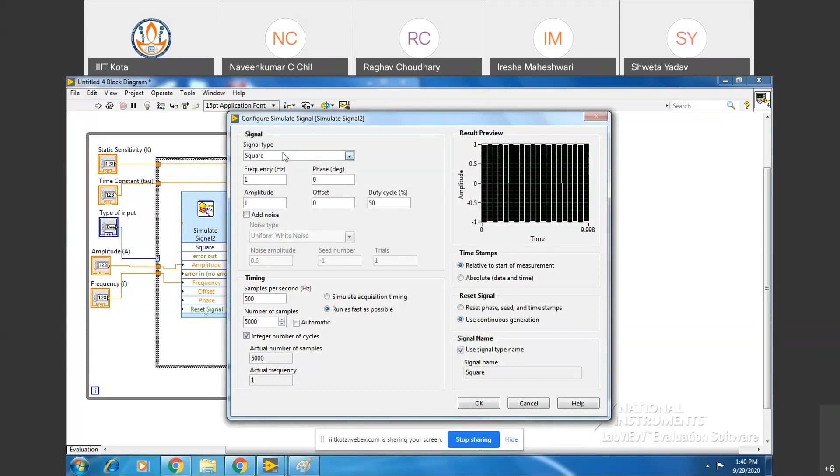Actually, I have still not changed that to make the default square. Sinusoid is still the default one. No problem, can you share your screen again? Sure, sir.

Can you see the screen, sir? I can see that - for sinusoid you have it correct. Now can you change it to square? Next one, yes, it is correct. Then the third one, triangular.

Click on that arrow on the selector label - the third one, triangular, go back. Yes, triangle, it is right.

Now right click on the case selector label where triangular is written. Not somewhere else, put it there. I think you have to stop.

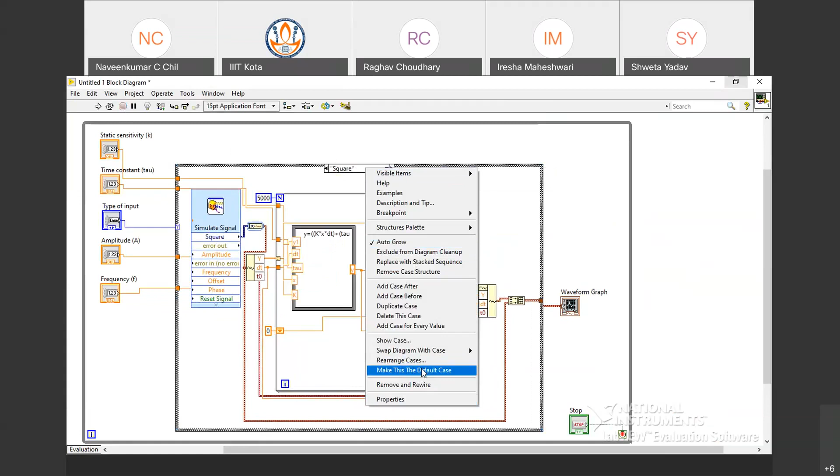Now let's see this - go to square. Right click, then go to rearrange cases, from the bottom third towards up. Make this case default, move it down, down, down. Now this is your default case.

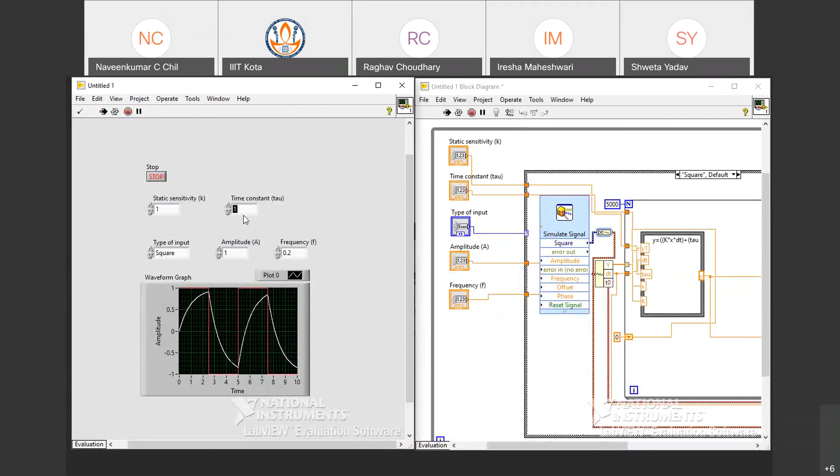Okay, now you run it. Now let's see that it is coming - make the time constant 0.1. It is coming, yes. Make the frequency 1. Okay, it is coming now.